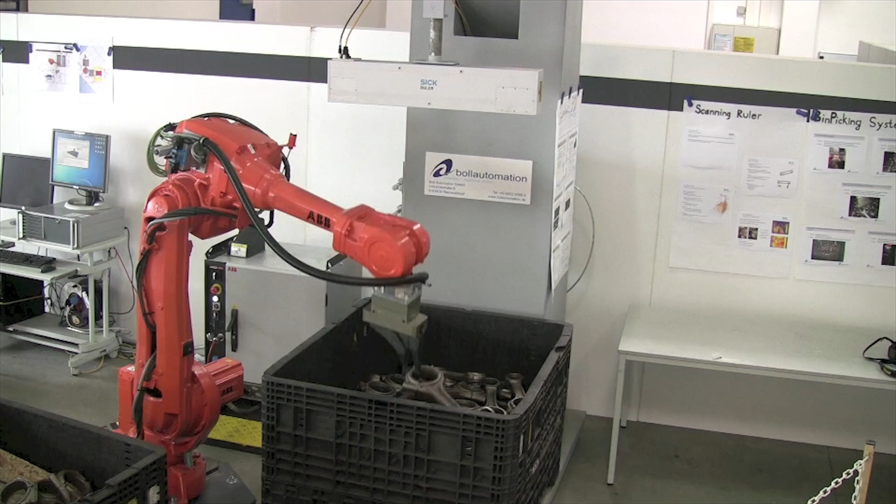PLB, the 3D vision system for part localization in bins by SICK, is designed for precise localization of randomly oriented parts in bins and boxes. The PLB system uses CAD-based 3D shape matching and takes on the challenge of handling materials with complex and overlapping shapes. Using the PLB system has several benefits.

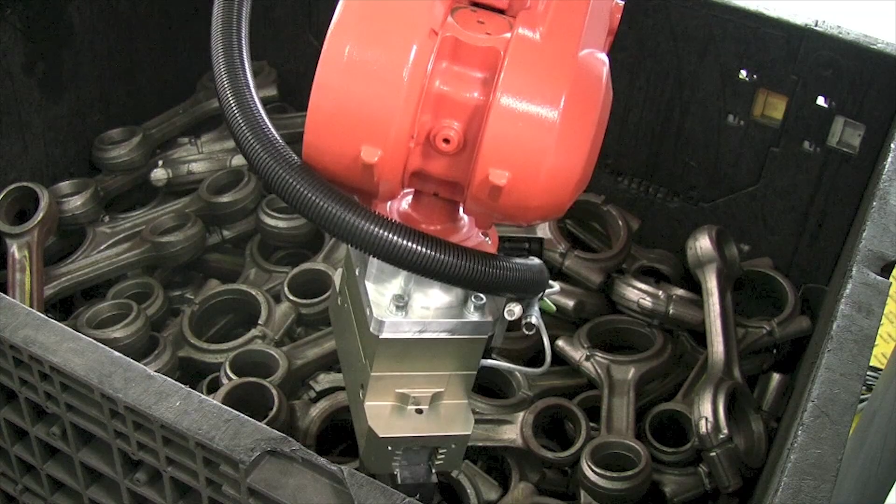The advanced 3D camera ensures superior image quality and reliable results, even under varying ambient conditions. The combination of precise 3D matching and short measurement time supports a high production rate.

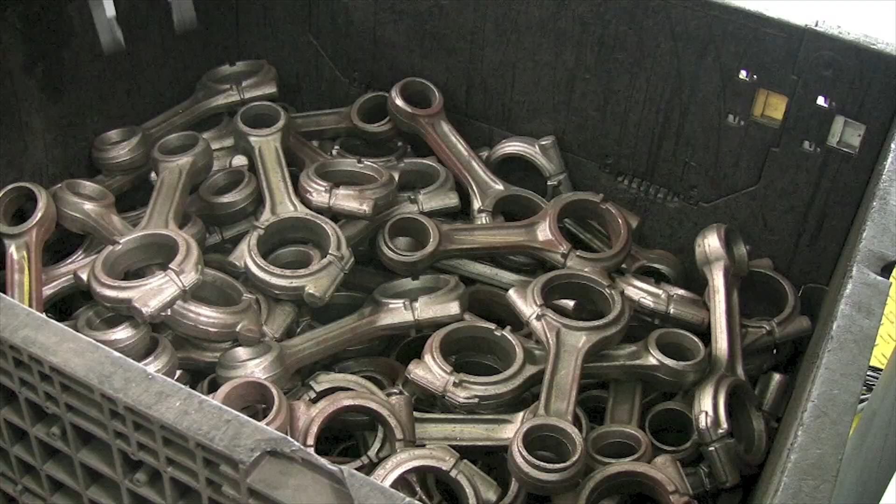Tools and functions for calibration as well as communication with a robot and PLC also make it easy to get the system into production. Once running, it provides flexibility as it enables fast introduction of new parts into existing work cells. In summary, the PLB vision system facilitates cost-effective design of robotic part handling.

The system includes application-tailored software that can handle full 3D rotation of complex parts, as well as cases where parts overlap. It also checks for gripper collisions locally.

The software takes 3D CAD models of the parts and gripper as input and outputs possible gripping positions in robot coordinates. The 3D camera acquires dense 3D images that are independent of availability of features on the parts.

Image acquisition is independent of external motion. The images produced have a high quality, and the camera's ruggedness makes the system insensitive to contrast and color variation and ideal for use in applications involving metal part handling.

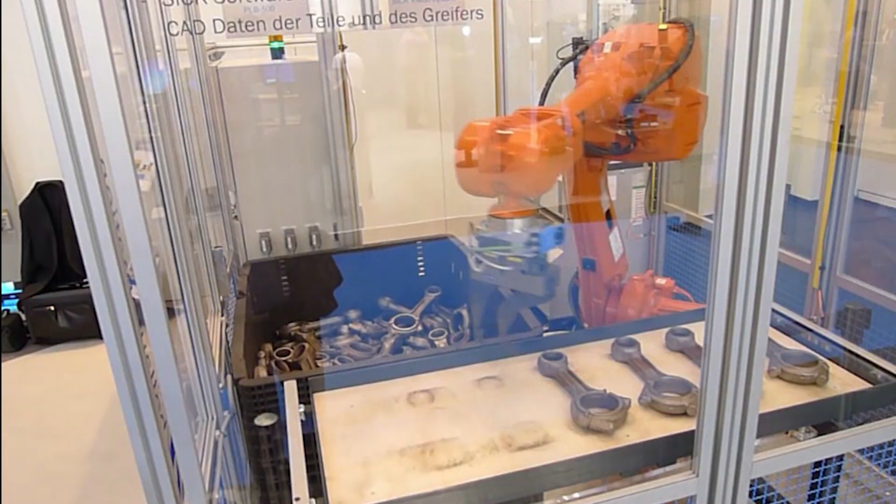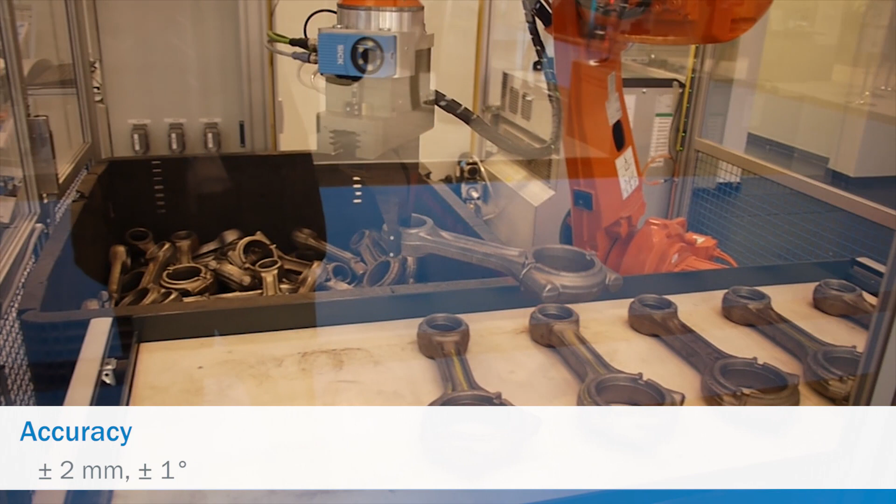Part localization time is typically between 5 and 10 seconds. The system locates parts that are larger than 150 millimeters in all dimensions and can do so with an accuracy that is typically smaller than ±2 millimeters and ±1 degree of rotation.

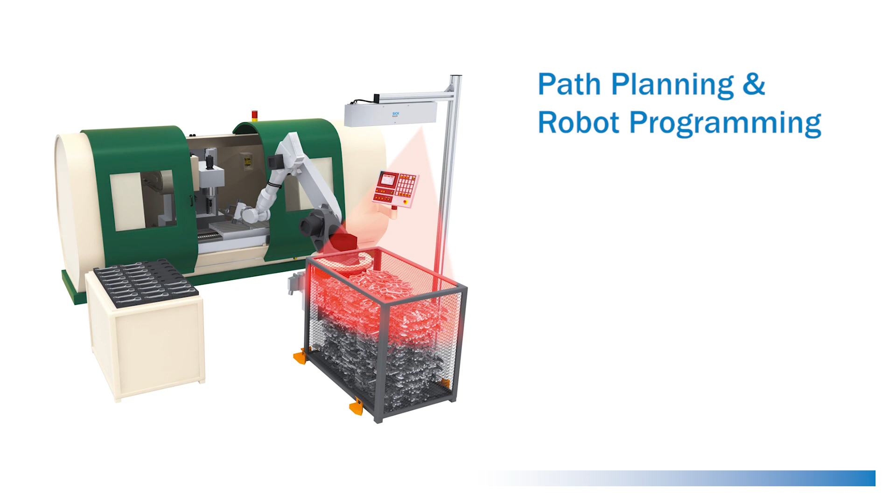The three main challenging areas of robot automation are path planning and robot programming, gripper design, and localization of parts and objects. SICK provides a solution to the localization problem.

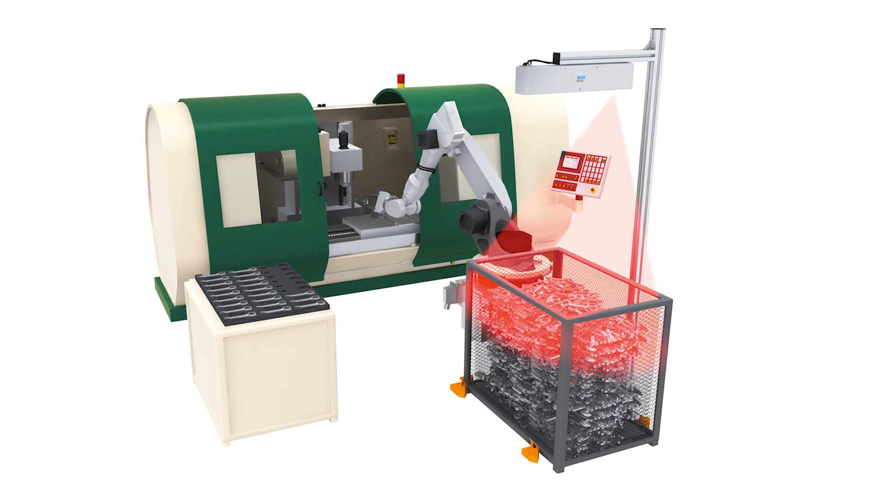The PLB system takes care of the following steps in the process: image acquisition, part localization, part grippability verification, and transfer of part position to the robot controller.

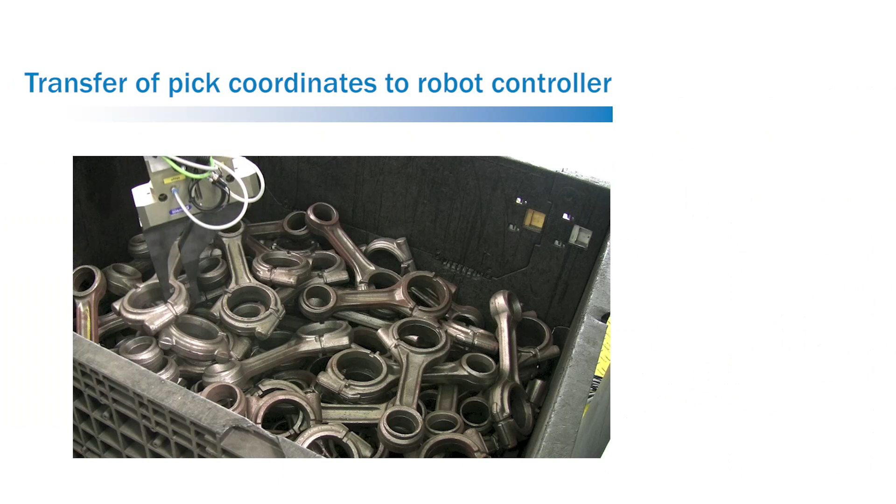The PLB system from SICK is both flexible and robust. Designed with easy integration and flexibility in mind, it can keep up with a high production rate, even under demanding conditions.